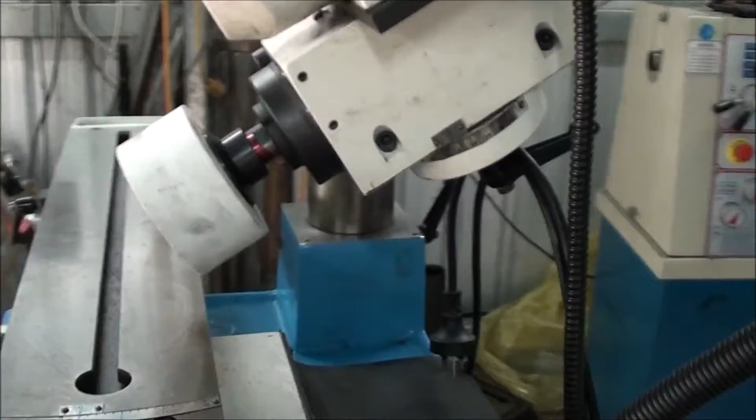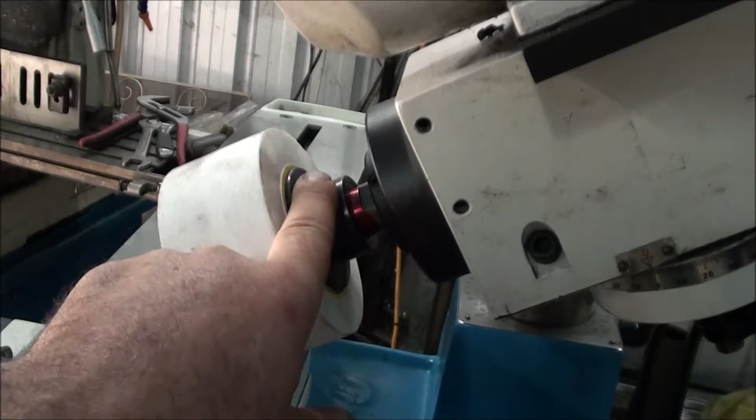Okay, the trusty tool and cutter grinder. What I want to do is make up some new hubs - or rather, I need some extra hubs for holding stones, because I don't want to be changing stones and hubs every time I do a stone change and true them up.

It's very time consuming. So what I wanted to do was measure the taper, because the hub's on the taper. I wanted to measure the taper. Now I measured it and I came up with some rather interesting numbers, which we'll go through in a bit.

Then after I'd measured it, I was also trying to check the accuracy of some machining that I'd done, and I came across a little gremlin which I'll go through with you now. We'll have a look at what I found to be a problem, and then we'll go through how I'm going to fix it.

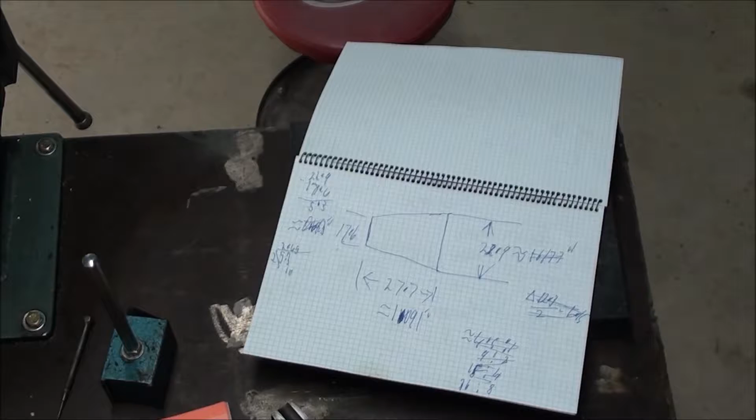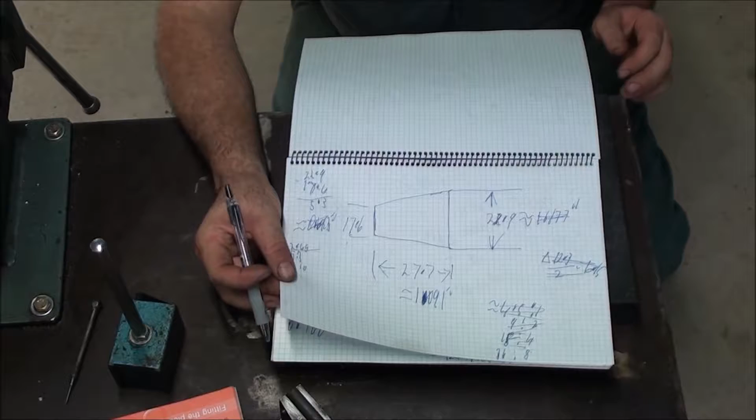So what I did was measure the taper - small diameter, large diameter, distance - and it's damn hard to measure on a machine. I don't know how well you can see that, I hope you can see it well enough. I won't know until I actually have a look at it.

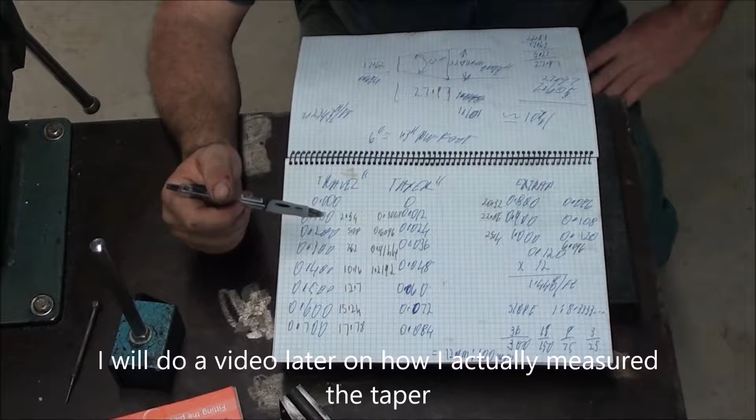I measured it twice and came up with two different sets of numbers. So what I did was get two dial gauges and put one on the taper - one ran along the taper and one ran along the y-axis on the grinder. I wound it in 100 thou at a time because my gauges were imperial, and I took measurements on the taper, and from there extrapolated it out because it was consistently going up 12 thousandths of an inch per 100 thou.

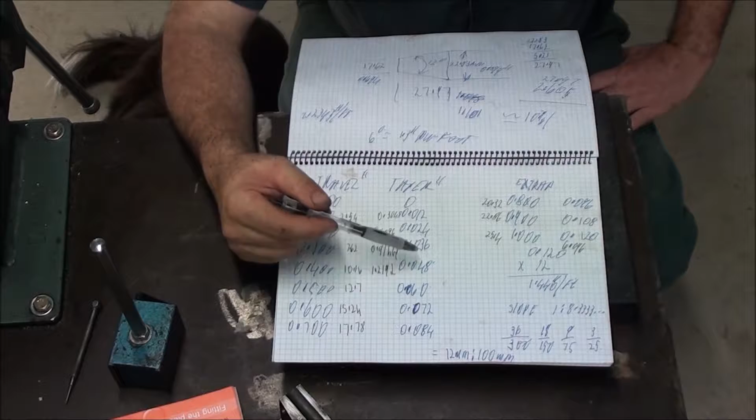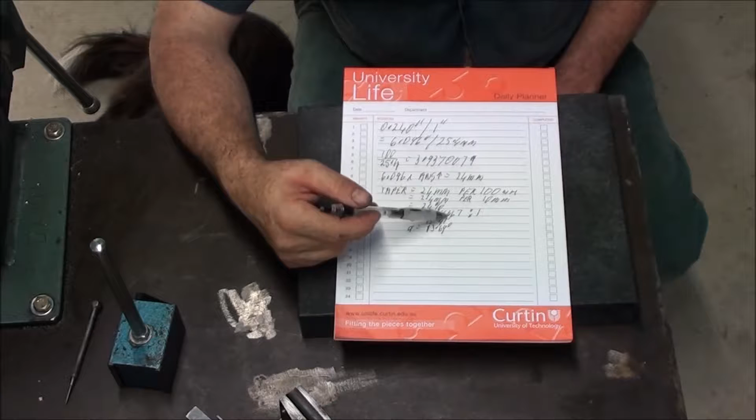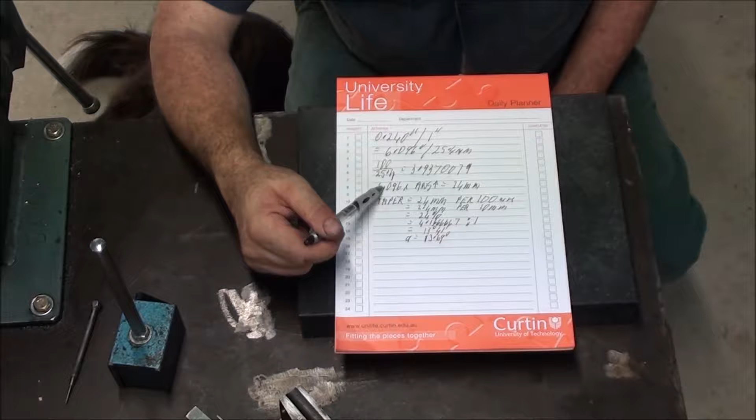I say 24 to 1, but it doesn't actually work out at 24 - it works out at 4.166. But anyway, we ended up with 240 thou over 1 inch, which, being a metric machine, I converted back to 6.096 per 25.4 millimetres. Now 100 divided by 25.4 equals 3.9 and so on, so the 6.096 multiplied by that answer gives you the 24 mil, which lines up with what we had in the imperial numbers.

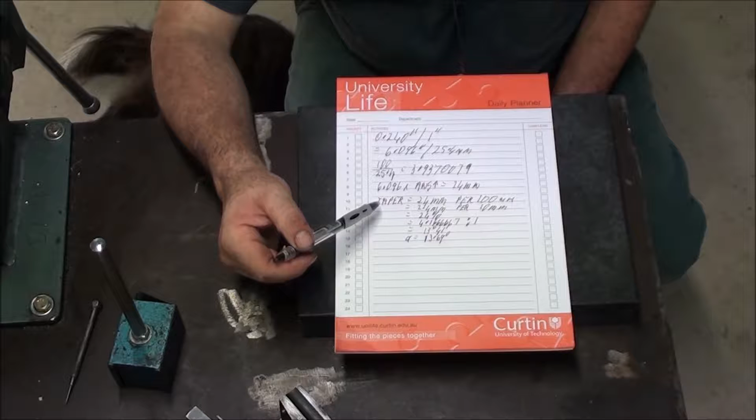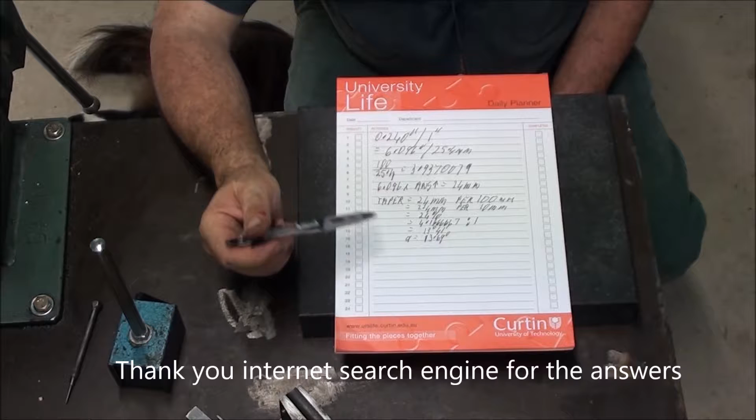So the taper is 24 millimetres per 100 millimetres, 2.4 millimetres per 10 millimetres, 24%, but it's 4.16666 recurring to 1, which is 13 degrees 41 minutes, or 13.69 degrees. So I thought, that's just - unusual is a good way of putting it. But it is a metric machine and it's made in Asia.

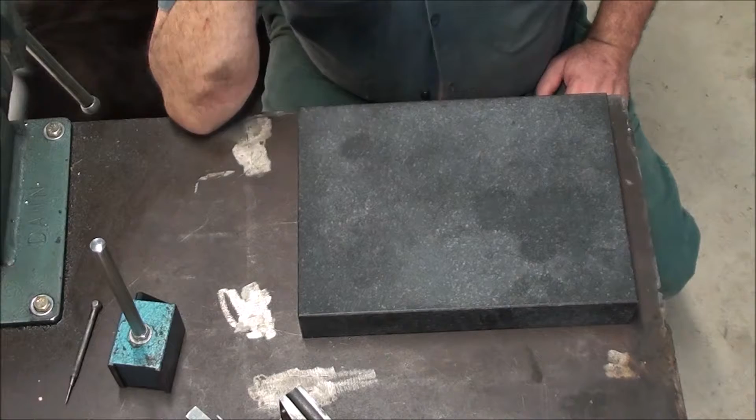But coincidentally, the bases I was using for the dial gauge, the next job I did was trying to check some machining accuracy. I came to my surface plate and put them on the surface plate, and actually this one's not too bad - this plate is accurate to within 1/10,000th of an inch.

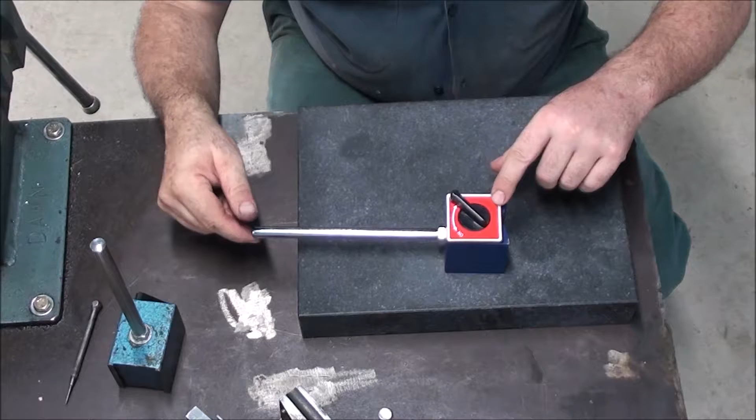But as you can see, and hopefully you might be able to hear it, this here rocks like you really don't want to know about. And if I bring it over onto the back face here, well, it's not as bad.

Now this here's - I'll get that out of the way, get my stuff off there - a lapping plate. This has come from Carbotech, and as you can see it's specified to within 1/10,000th of an inch. Look, it's only a cheap piece of granite, it's not expensive, but what I found is that this one's got quite a bit of rock in it. If I take my metric feeler gauges here, that there's 7/100ths of a millimetre.

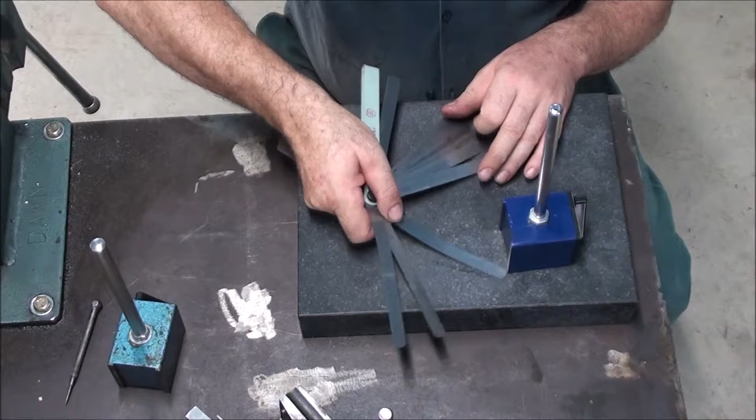Nine hundredths just gets in under that corner. So, 1/1000th of an inch is 2.5 hundredths. Yeah, well, 9 hundredths gets in there comfortably when I've got a bit of cock weight on this corner. 0.1, let's go. A little bit yuck there, so 0.1 gets in there quite comfortably. So that's about 4 thou out there.

There's no point getting too much carried away. We can see that one there is not particularly good. This one here's got a little bit less. 0.1 won't go in. 0.08, 0.08 just gets in there. Probably should be a little more.

Got this on the back here, we'll see here. That's 0.07. 0.1. 0.15 here. So 0.15 gets in under the corner there anyway. So 0.15, that's roughly 6 thou out. 0.1's about 4 thou out, just a fraction under. So that one's not very good.

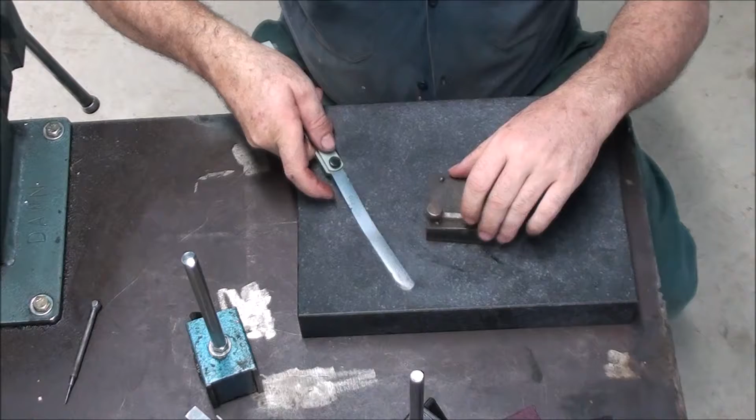2.5 hundredths of a millimetre is 1/1000th of an inch, so that's pretty much what you'd expect.

So what I'll do now, this is just a bit of 360 grit, wet or dry. Just going to give this a quick rub, just to give it a little bit of a clean up. The surface here is not as clean as I'd like it to be.

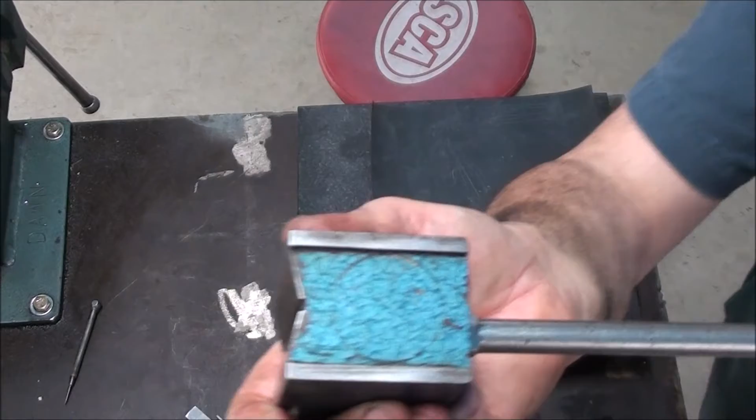As you can see, we're a long way away from a full contact there, and on there we're touching here, here, here. So the moral of the story is there's a little bit of wobble there. I feel just a fraction of wobble there. The moral of the story is that even though you buy stuff like this, when I bought it, it was quite expensive. I forget what I paid for it because I've had it for over, well, probably getting close to 30 years now.

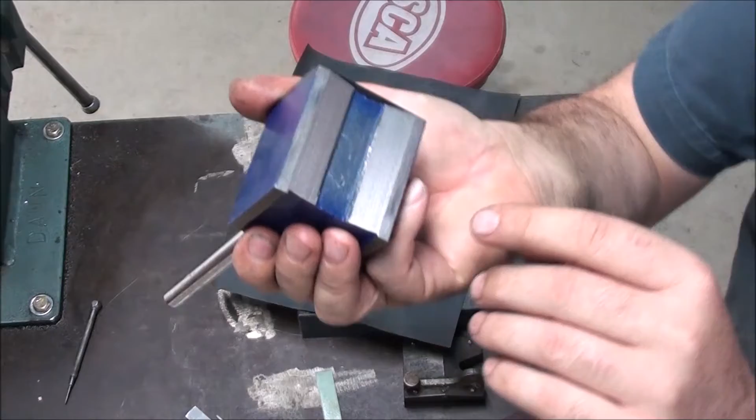You might be able to see, I hope you can see, it's touching there, there, and I'm actually having trouble a little bit here. So we've got one contact point there, one here, one here. As you can see, these actually look like they've been finished in a shaper, to be honest with you. Just a shaper or a belt. That looks like it's belt finished.

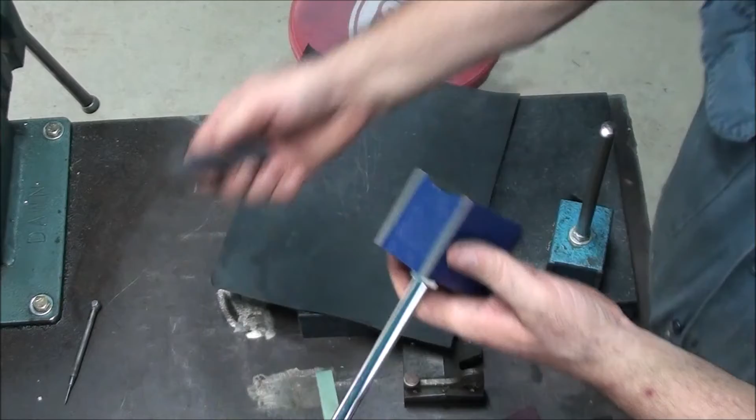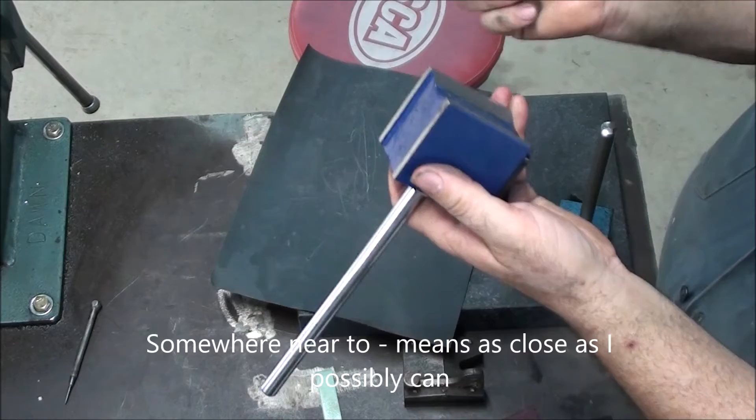Yeah, these might have been, if they've been finished on a stone, it's been a pretty mediocre job. So what we're going to do is we're going to have to make these flat. And what I would like to do, although it's not critical, I'd like to get these somewhere near to 90 degrees to each other. Because if I've got them at 90 degrees, then I can actually use them as magnetic clamps for holding stuff. So that's what we're going to do.

We're going to try and get them as close to 90 degrees as I can, and we're going to try and make them flat, so that when we put them on here, they don't rock like that. And then I can start using them for actually testing stuff. We'll be back soon.